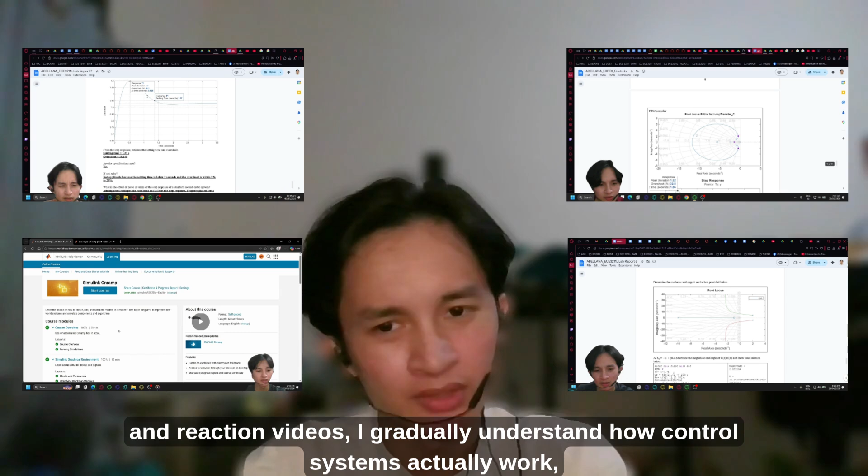So for this semester in ECE3211L, or Control Engineering Laboratory in short, I learned many important concepts about control system stability, transfer function, and control design. At first, many topics looked difficult, especially the mathematics behind poles, zeros, and system response. But through experiments, MATLAB simulations, and reaction videos, I gradually understood how control systems actually work and why they are important in engineering.

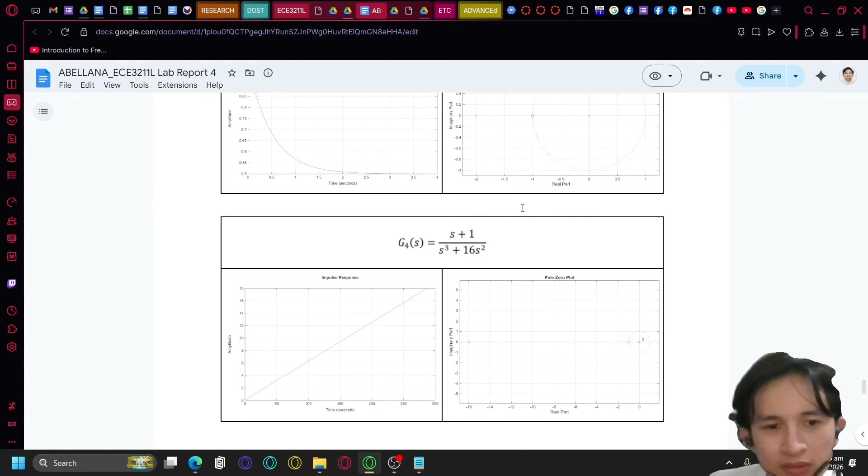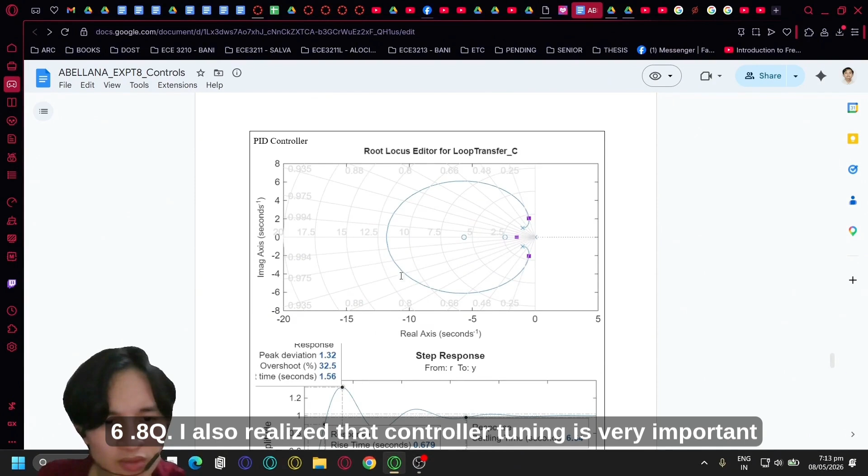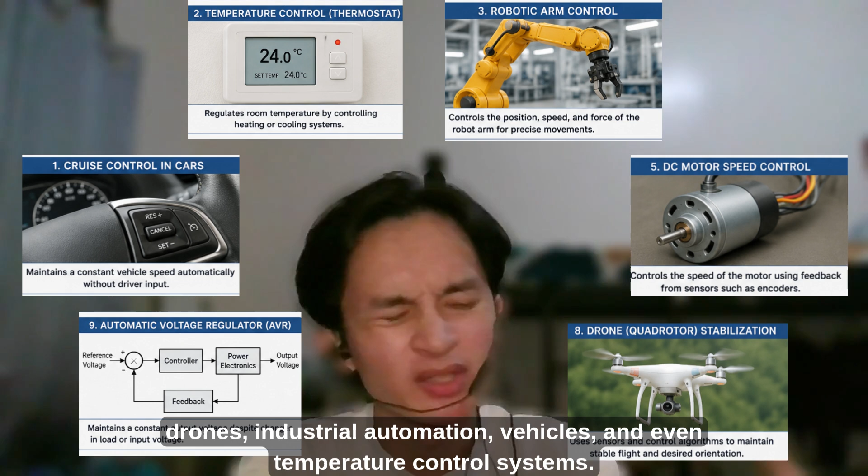From videos A to I that I watched, which were provided by Sir, I learned the foundation of control theory and how engineers use control systems in real life applications. I learned that control systems are everywhere, such as in robotics, drones, industrial automation, vehicles, and even temperature control systems. I also learned about transfer function, which mathematically describes how a system reacts to an input.

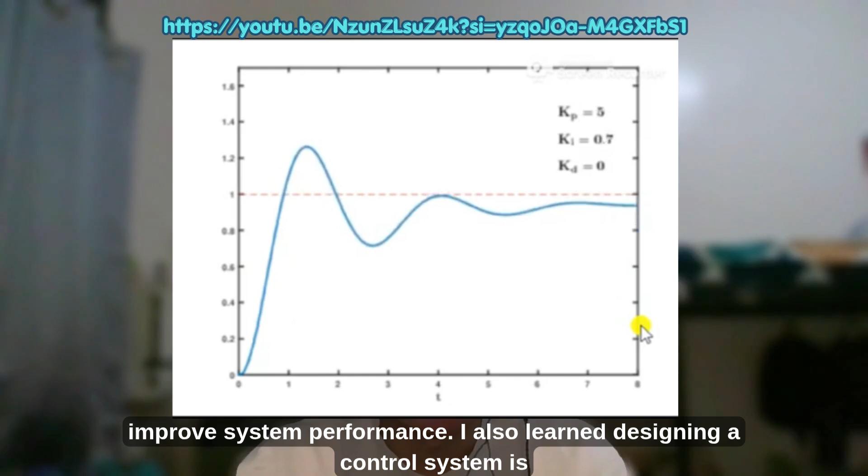Stability was another important topic because an unstable system can become dangerous or unusable. The videos about PID control were especially helpful because they explain how proportional, integral, and derivative control work together to improve system performance. I also learned designing a control system is not only about making it fast but also stable, accurate, and efficient.

So, in the early experiments 1 to 4, I learned the basics of transfer function and time response. I learned how to derive transfer functions from differential equations and verify the results using MATLAB. I also studied system responses such as overshoot, rise time, peak time, and settling time. Another important lesson was system stability. I learned how poles and zeros affect the behavior of a system.

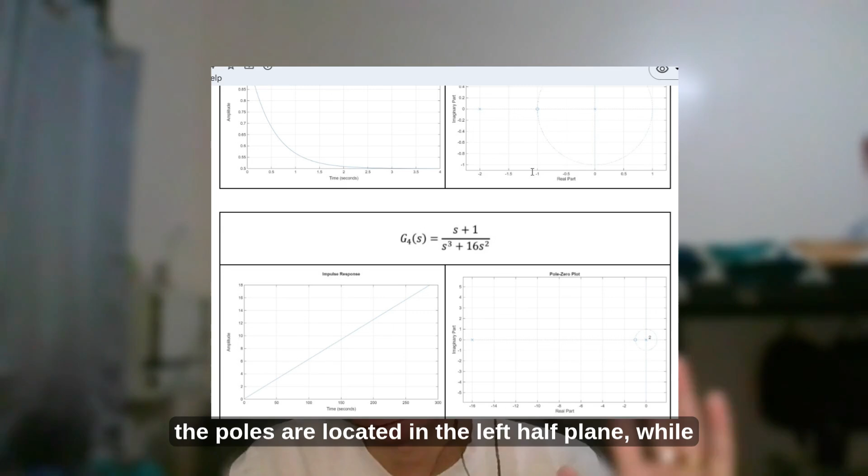A system becomes stable when the poles are located in the left half plane, while an unstable system has poles in the right half plane. This experiment taught me that even small changes in the pole location can significantly affect how a system behaves.

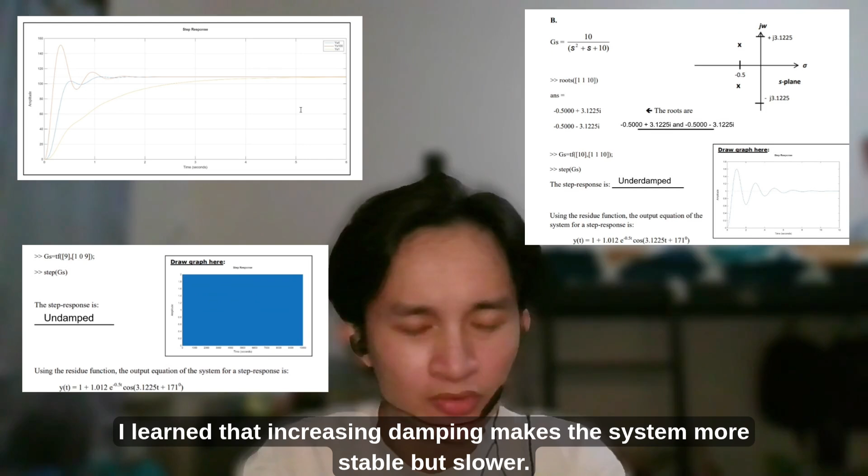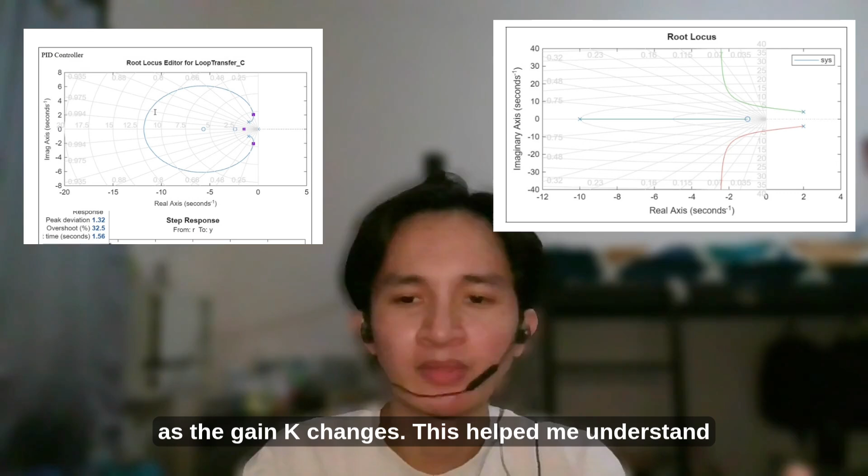So in experiments 5 and 6, I learned more about performance specifications and root locus analysis. I studied how damping ratio affects oscillations and overshoot. I learned that increasing damping makes the system more stable but slower, while lower damping makes the system faster but more oscillatory. So for root locus, I learned how poles move as the gain K changes. This helped me understand how engineers tune systems to achieve the desired response.

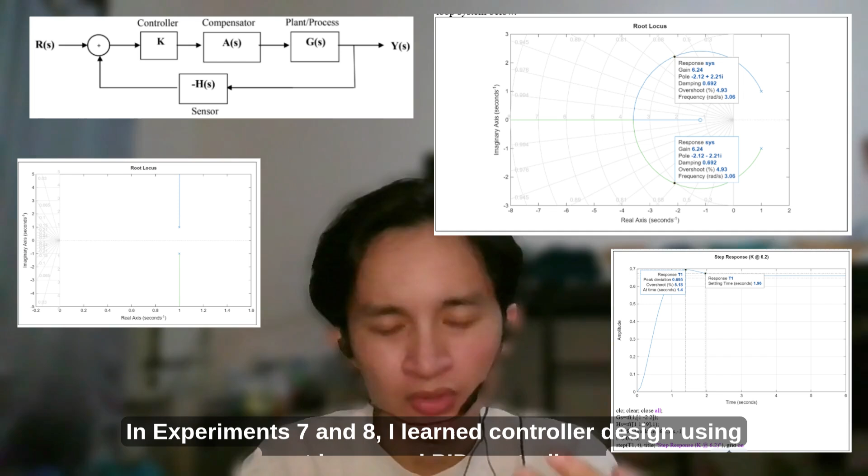So MATLAB became very useful because it allowed me to visualize the behavior of the system instead of only solving equations manually. So in experiments 7 and 8, I learned controller design using root locus and PID controllers. For root locus design, I learned how compensators and added zeros can improve system performance. I saw how adding zeros changed the settling time and overshoot of the system.

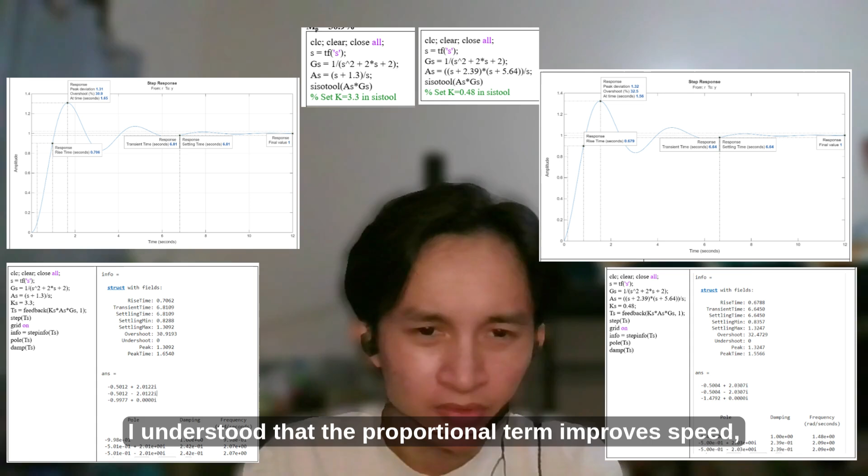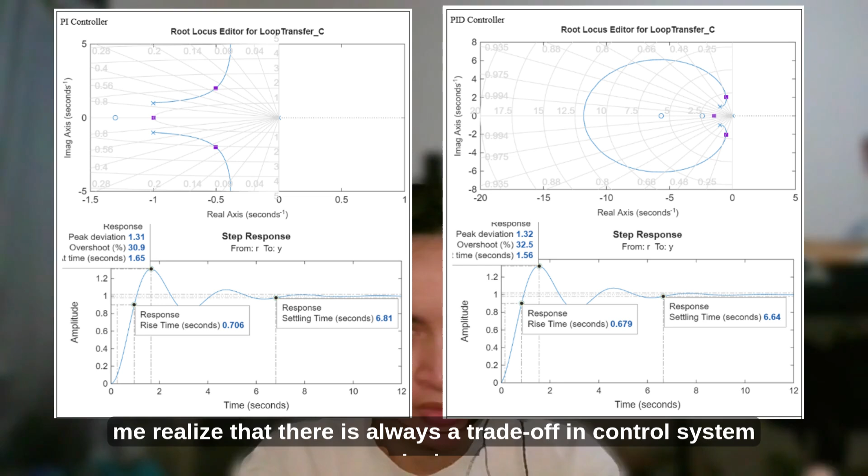In experiment 8, I learned about PI and PID controllers. I understood that the proportional term improves speed, the integral reduces steady state error, and the derivative term helps improve damping and reduce oscillations. So comparing PI and PID controllers helped me realize that there is always a trade-off in control system design. Faster systems may have higher overshoot, while more stable systems respond slower.

So one challenge I encountered in this subject was understanding the mathematics behind poles, root locus, and transfer function. At first, MATLAB and SISOTOOL also felt confusing to me. However, through repeated experiments and practice, I became more confident in interpreting graphs and understanding how systems respond.

As a future engineer, one important lesson I learned is that control systems are not just equations. They are practical tools used to make systems more stable, efficient, and reliable. So overall, this subject helped me better understand how engineers design intelligent and stable systems in real world applications.